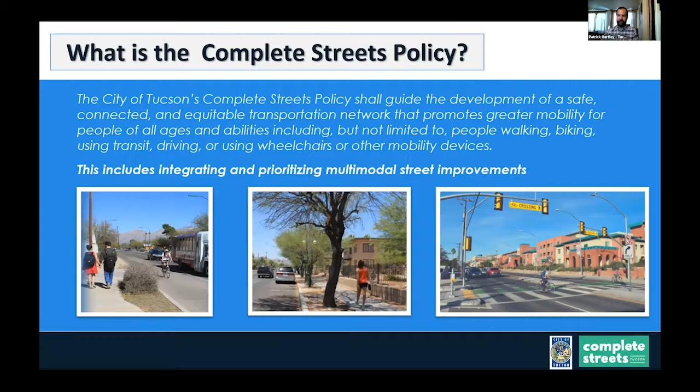One of the major strengths of this particular policy, I think, is that it wasn't just developed by staff and sent up the line to mayor and council for action. It was actually the culmination of over 2 years of community work, community building, education, and really establishing and building momentum behind communicating to residents of the city what complete streets are, the value of them, and building that support so that when it came to discussion by mayor and council, it became an easy action for them.

So we began in October of 2016, and this was really a community-driven effort to create the Complete Streets policy led by a local organization called Living Streets Alliance. And they were building the community, doing the groundwork, building the community support, doing the education, and later on actually engaging the department, the City of Tucson. So by the time we did bring this to mayor and council, it became a strong partnership driven by the community, guided by the community to get the support and the buy-in of the city's council.

The policy itself is really guided, driven by these series of guiding principles, which I think are key in our framework that we want to use for all of our transportation decision-making going forward. So looking at making sure we're thinking first and foremost about safety, that as we do transportation design and planning, that we're considering accessibility of all people, people of all ages, all abilities. Strengthening our commitment to equity, diversity, and inclusivity. In particular, right now we're going through a long-range planning process, and we are looking at what that means for the types of projects that we want to pursue in the future of the City of Tucson, and really defining equity in a way that is consistent with the language of that policy.

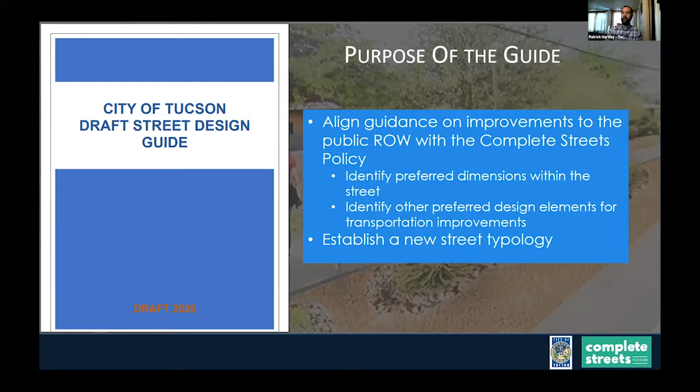The intention of the street design guidelines we're working on is to be guidelines, not a new set of standards. However, once approved, the guidelines would inform any future standards or policies we adhere to in the department. The intent is really to be descriptive of how we want the streets to look in the city of Tucson, based on the policy language about meeting the needs of all users and being comfortable places to be. What does that look like in execution?

They're supplemental to existing engineering practice, not a whole-scale replacement of everything we do. And it has multiple audiences, so it's presented in a way that can be used by city staff, project development teams, but also we hope it's something the public will engage with, ultimately making them strong advocates for complete streets type projects.

The use is intended to be at the planning level, planning and early design, referenced early in project development. This isn't an engineering document.

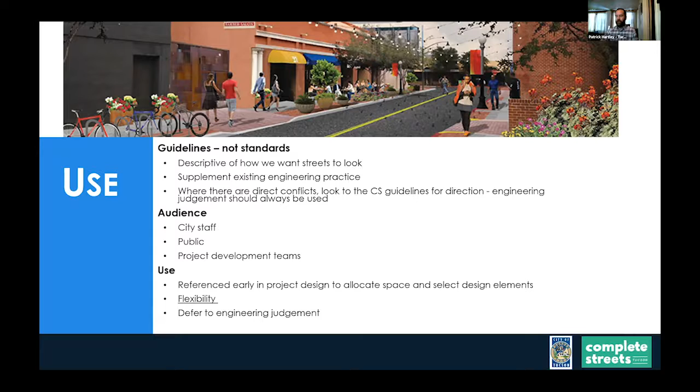Throughout the entire design manual we're developing is a commitment to flexibility, understanding there are going to be extenuating circumstances on all of our projects that will need flexibility. But what it's communicating is really the intention of the department: these are the types of decisions we want to make when we have X number of feet of right-of-way for a corridor or a roadway improvement, and this is how we want that space used. In all cases, we want to make sure we defer to engineering judgment as appropriate, to make sure we're building the safest facilities.

So one of the things we're looking at is developing a new street typology, which is going to be complementary to the existing federal functional classification system.

So it's not going to be a replacement for the functional classification system, but really it is a structure by which we can guide design decisions and think about what we're trying to accomplish with a given corridor, given facility, and what users we want to prioritize in our investments.

We're looking at a structure of 9 new street types rolling out in the city of Tucson, based on a combination of the function of the roadway, including operating speeds plus volumes, as well as the urban environment. We've got downtown university streets, the roads around the University of Arizona or within downtown; neighborhood commercial streets, which are smaller scale, residential scale commercial; urban thoroughfares; urban connectors, which are denser areas of the city but high volume roadways; suburban connector; suburban thoroughfare, same idea as the urban context but within a suburban context; neighborhood streets; shared streets; and industrial streets.

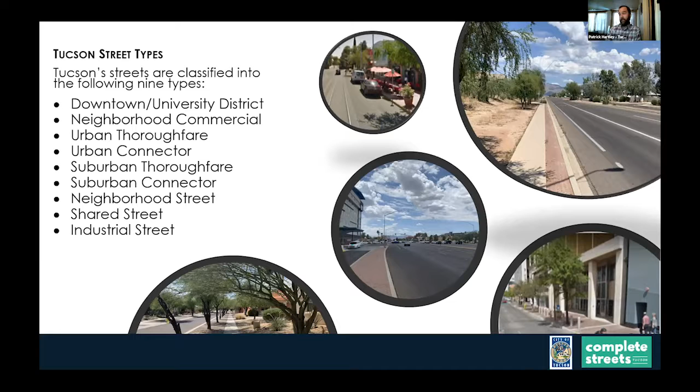And this is how we are applying that. So this is a very busy screen, I recognize that, but it's intended to communicate how we're approaching laying out our streets. We've broken each of our roadways, based on the specific street type, into preferred dimensions of the roadway elements. So we've taken the pedestrian realm, the street realm, and the median realm, and you look at the frontage zone, sidewalk zone, and planting zone within the pedestrian realm, for example. What we're providing as a department is a preferred minimum and maximum dimension within each of those street design elements.

So we're looking at a downtown university street, for example, and the sidewalk—our preferred width of the sidewalk, knowing that's going to be a high activity pedestrian area, would be a preferred width of 8 to 12 feet. Minimum is 6 feet, and we're not going to establish a maximum.

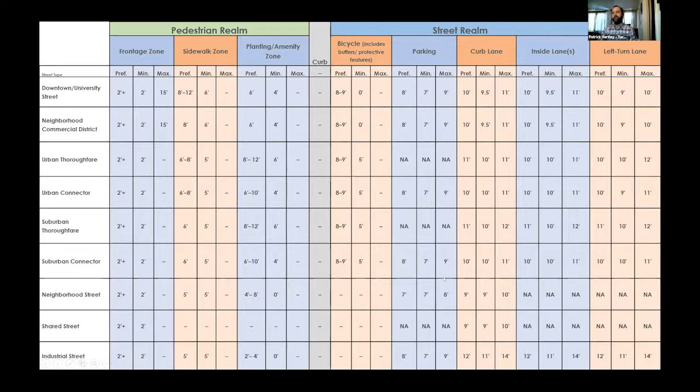And then if you look over at the other side, you can see that narrower travel lanes would be in those operating environments. Comparing the urban thoroughfare to the suburban thoroughfare, for example, you would have a narrower sidewalk as the preferred width than you would in the downtown environment, a little wider inside travel lanes, and on and on. The suburban, which would be assumed to have a higher operating speed, has wider travel lanes, for example. So this is the reference, the lookup table for the design considerations for each of those various street types.

The guide also provides a number of example cross-sections that are used to illustrate what the complete streets concept is intended to look like within the city of Tucson, and how we want to prioritize space within a given right-of-way.

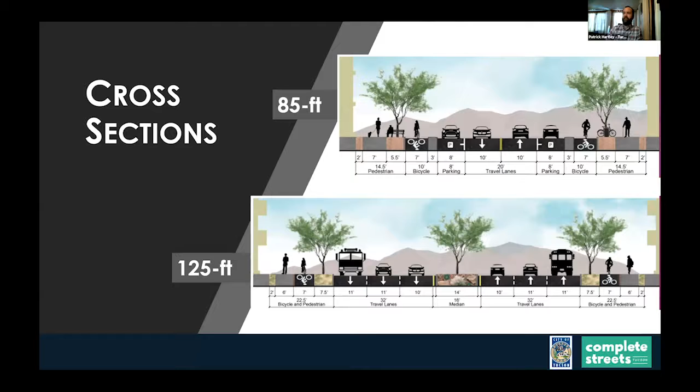So we're looking at wrapping up the design guidelines, which I think will be really a valuable tool for us in the implementation of the complete streets policy as we move this forward.

We closed the comment period on the design guide in June of this year. We're working on updating the document based on those comments, doing document layout, adding graphics, and we're looking to bring it in front of mayor and council for approval and review in fall and winter of 2020.

The nice thing about this, and what makes this easier from a staff perspective, is that we've already established the support of mayor and council around these concepts through the policy, and they've given us our marching orders and direction to develop these types of documents to rethink the way we design our streets. So we're confident that should be a pretty straightforward exercise, and we already have the support of leadership within the city. Once we approve the guidelines, it's going to give us departmental direction to begin updating all of the other standards and policies we use in road design.

So looking at our technical standards manual, our access management guidelines, engaging with the fire department around the Tucson Fire Code, to make sure everything is in alignment and consistent with the overarching goals of the policy and the guidelines.

We've also started a couple of initiatives in the meantime, so we wanted to make sure we were keeping the momentum going around the policy. We didn't want to do the policy and then come to a full stop, releasing the design guidelines a year and a half later. So what we're currently working on is the Move Tucson Long Range Planning Initiative.

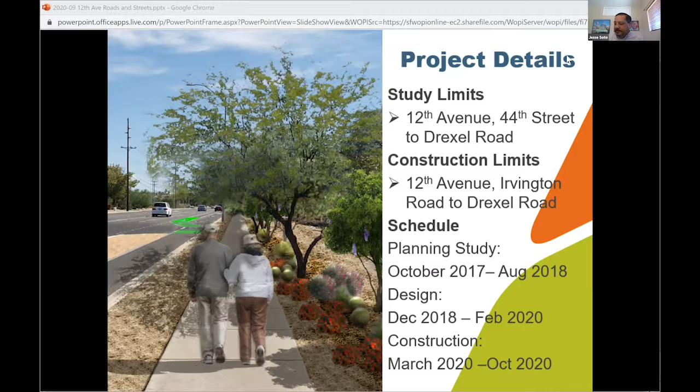A few years ago we looked at 12th Avenue, and the purpose was to look at the multimodal street improvements we could probably do within the area, to establish priorities and investments along 12th Avenue to bring in a design that we could hopefully find funding for sometime in the future and make the improvements along there a reality.

Traffic volumes along 12th Avenue range anywhere between 6,500 vehicles per day to 19,000 vehicles per day. So it gets pretty heavily used, from the area of Ajo going up to Irvington, and obviously we all know Valencia as well.

During a 5-year period, we did a study from 2011 to 2015, where there were 17 crashes, 3 involving bicyclists. 14 of the bicyclist and pedestrian crashes occurred after 5 p.m.

A sidewalk and driveway inventory was also performed along 12th Avenue. It showed that 19% of the area didn't have actual sidewalks, and approximately 1/3 of the sidewalks along the area abutted to the curb. We also looked at the multiple driveways along 12th Avenue, which gave us a feel for what was going on in the area. There was a lot of concern because of the wide amount of driveways that every business had along the corridor there.

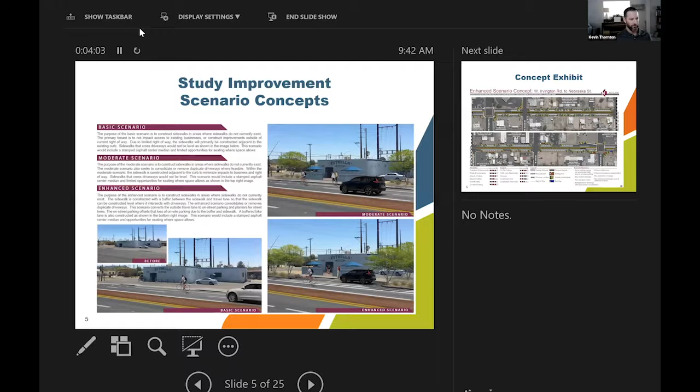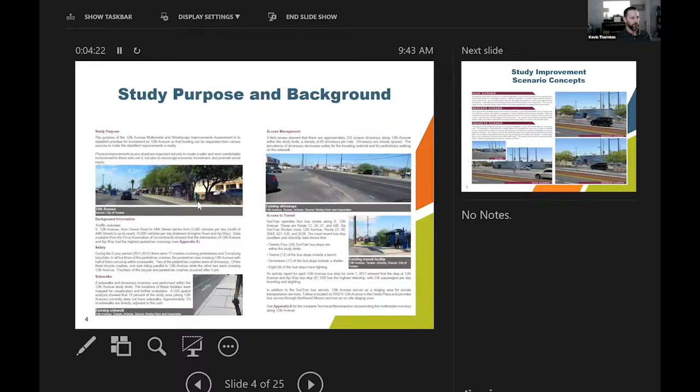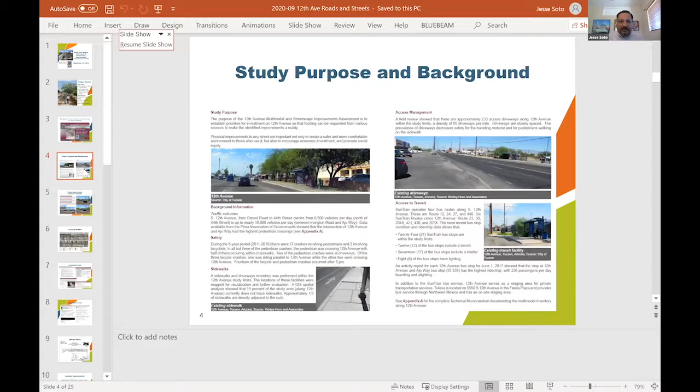Jesse, we're not seeing your slide switch — I think we're still on slide 3. Is that the slide you're on? No, it should be on slide 5. What do you see now? Sorry, we see the PowerPoint edit view, not the presentation, and it's showing slide 3. Maybe press present. Press the little present button at the lower right of your screen, the present slideshow button. No, it's not showing anything. Now we're not sure — oh, we see slide 25. Under display settings, is there an option to switch the main screen? Now, okay, we're back, we're seeing slide 3. Sorry, maybe try resume slideshow, or that's where you just were, isn't it? You see slide 4 now? Yes, okay, let's do it like this. Now we see slide 5. Okay, sorry about that, geez.

So during the actual design phase, we developed 3 different concepts along the corridor. The first concept we called the basic concept. It was just to look at installing new sidewalks and ADA compliant sidewalks throughout the corridor, and also make small improvements such as some stamped asphalt and small modifications to landscaping.

The second concept was what we called the moderate scenario. The moderate scenario included sidewalks, some reduced driveways, and put in some stamped asphalt along the median there.

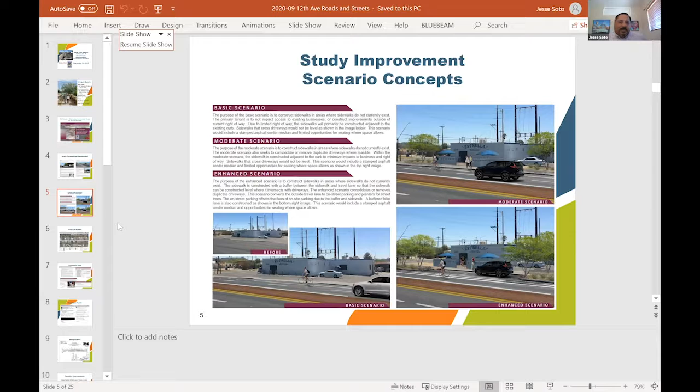But also looked at opportunities of possibly closing some of the driveways along the actual corridor. The third one is what we call the enhanced concept. This one here was pretty much the full complement of everything.

This is where we had ADA sidewalks behind curb. We had a buffer between the back of curb to the actual sidewalk, a 6-foot sidewalk. On street, we narrowed down the actual effect of the road from 5 lanes down to 3 lanes, and also included some on-street parking. But the most important feature on this one was also the buffered bike lane that it offered, a 6-foot buffered bike lane along there. So this concept was really the one we were targeting, really the one we wanted to try to go for.

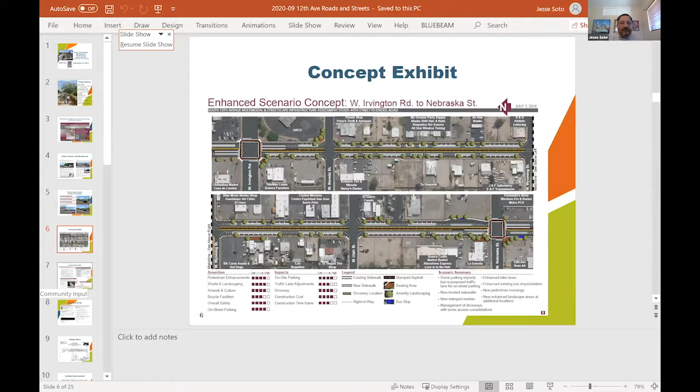We had a lot of community input. We went out to multiple events, meeting with neighborhood associations, meeting at different events, going out into the public, doing some workshops, and trying to introduce them to what we're trying to look at and display, so they could grasp what we're trying to do within the area.

Obviously, a lot of this was new. People didn't really understand it. They weren't sure how it was going to happen. They were really kind of hesitant to even accept what we're going to be doing out along 12th Avenue. It took a lot of discussions, many discussions, a lot of front work to kind of get out there and just assure people that what we're doing is something new.

And obviously, we as humans are kind of nervous about change sometimes. So we look at things and right away we don't like them. Therefore, having the discussion with the public, business owners, and also tenants was our biggest priority. We wanted to make sure we were getting their feedback and listening to them, because that's important for a partnership with the community.

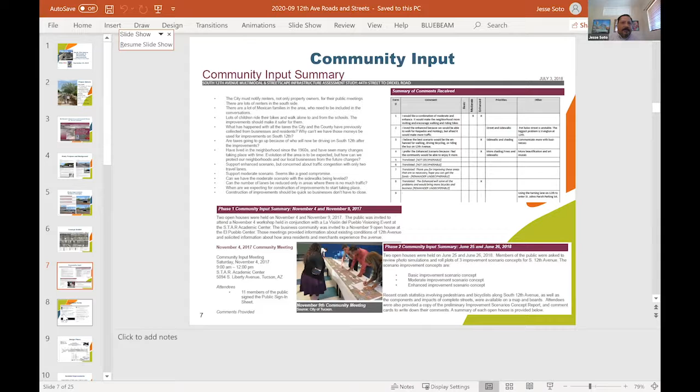We used it in all of our meetings, and it provided a lot of good information as far as what the public was looking at and what we needed to do within the area.

So now going into the design phase. Again, the design phase is something we wanted to ensure that not only were we, the city of Tucson, looking at all the different complete street models and how we're going to approach this, but also talking to the business owners and people immediately impacted by this reducing of the lanes, or also just leaving the way, what they wanted to do, and what we wanted to hear from them as far as what the need was.

So the design phase took a while. It took a lot of modifications. I know Kimley-Horn, we were going back and forth on some of the driveways, for example. There's something like 233 driveways throughout just that area alone.

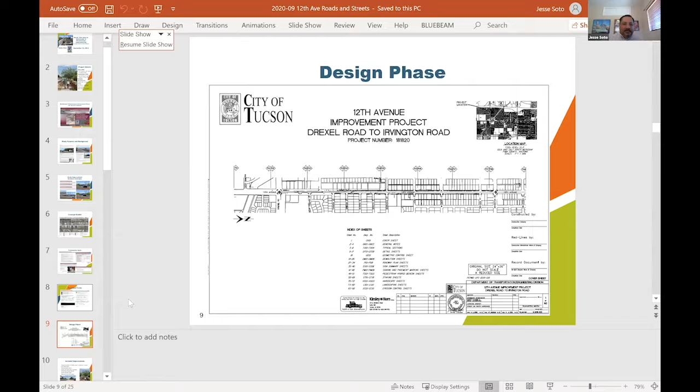So the design took a while. In this design, we finally concluded that we're going to come up with the reduction of lanes from 5 to 3 lanes, look at new sidewalks, put in some protected bike lanes, also enhance pedestrian crossings and pedestrian refuge islands, enhance bus stops, and reconstruct driveways.

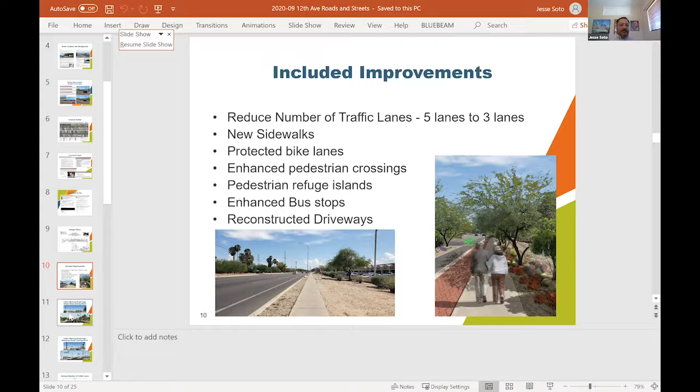Sorry about that. So here is the model that we actually used for the cross section along 12th Avenue. We kept the 11-foot center turn lane, 10.5-foot travel lanes. You got a 10-foot buffer there. The 10-foot buffer also includes on-street parking, but it acts as a buffer protector also for the 6-foot bike lanes. And then we have about a 3-foot buffer behind curb, and then a 6-foot ADA compliant sidewalk.

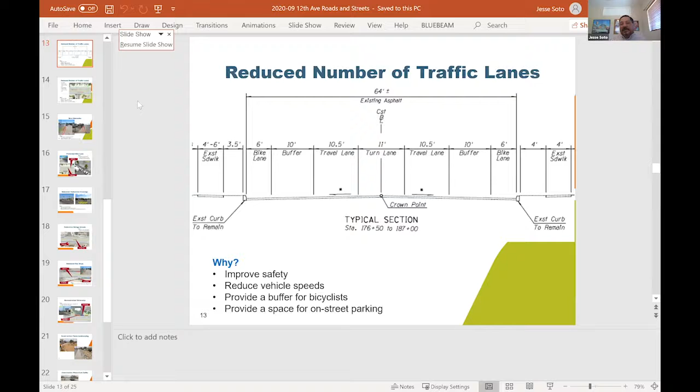So this shows how reducing the lanes, one going southbound, one going northbound, keeping the center lane, but also shows the medians and also the buffer for the protected bike lane, and then just shows a 6-foot sidewalk behind curb.

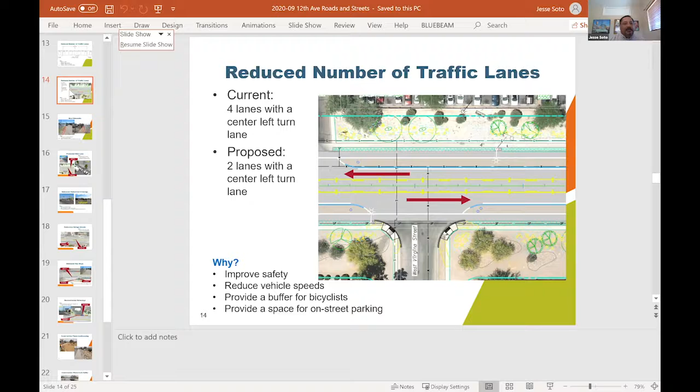So here, obviously there were a lot of concerns regarding ADA issues. We had people that were using walkers or wheelchairs, and they couldn't gain access to that bus stop located right there on 12th and Nebraska. They actually had to go onto the street because there was no ramp either. It was just a 6-inch vertical curb along there. So we got a lot of concerns about that area.

And so it feels good that now when you go out there, it's finally completed. And now you have ADA accessibility all the way through that area. And now residents, people with ADA issues, don't have to go out into the roadway anymore. And now they can travel safely along the new sidewalk improvements that have been added from this project.

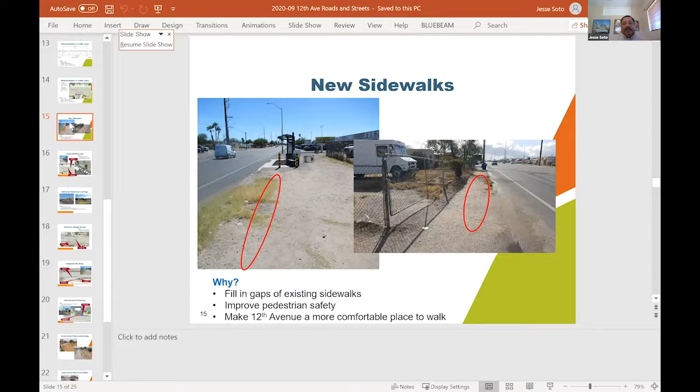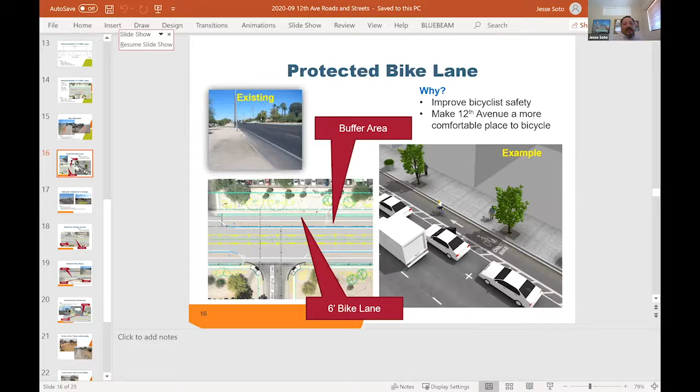Here are the protected bike lanes. Just kind of shows you got your buffered area, then you get your 6-foot bike lane. If you look at the example, you get your 6-foot bike lane, then you have your 10-foot buffer with on-street parking, and then you have your travel lane. So it allows people to feel a little bit safer as they travel through the area, and to also feel like they can get through there a lot smoother, a lot better.

We're also going to install a HAWK light over on Wyoming and 12th Avenue. We had a lot of feedback from the community, as there is a bus stop right there on the west side of the road that is used by a lot of people in the area that go back and forth. The second picture on your right kind of shows where people are just crossing at will. And again, that was an issue that we wanted to address, and if that bus stop is being widely used by residents of the area, we want to make sure that they were able to cross that area safely.

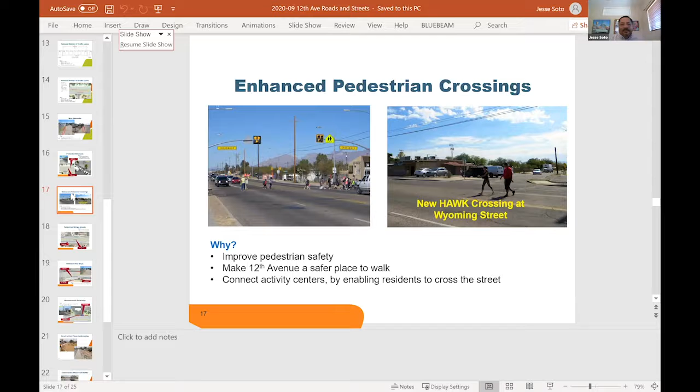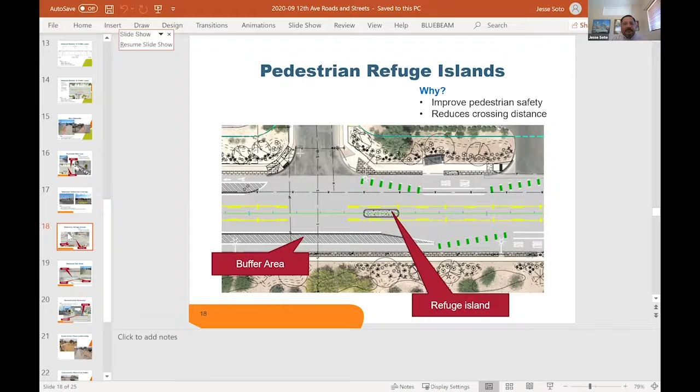This just shows in the bus stop area how we created the buffer along there, so that we can have a smooth travel lane, but then the bus dips off to the side to go and pick up passengers.

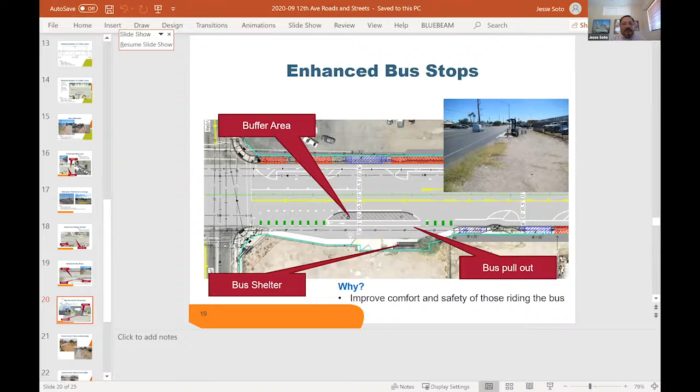And then, like I said earlier, we reconstructed new driveways. We had like 288 driveways. We narrowed that down from 288; I think we cut that in half. So that allowed us to create smoother travel for ADA and people walking and using that area, to not feel as if they have to be in a constant alert mode walking through there.

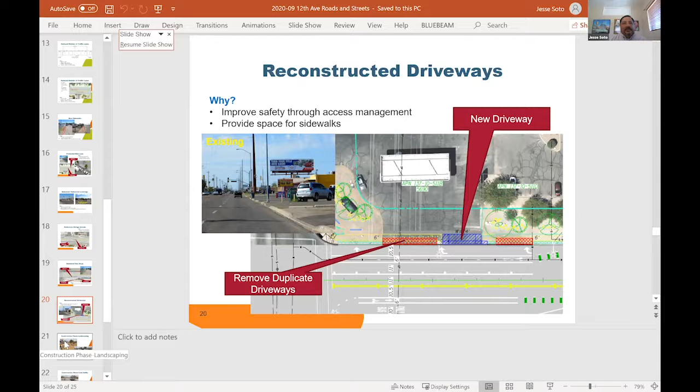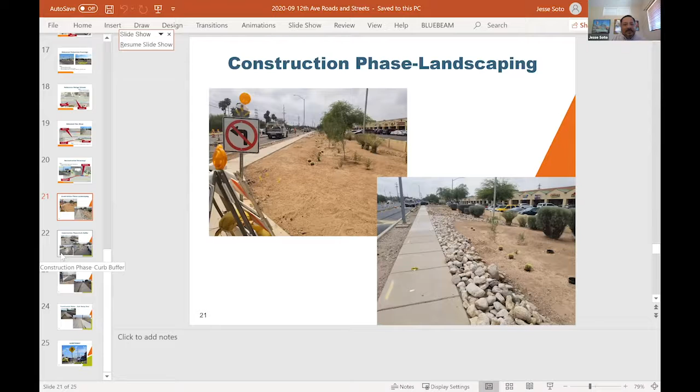We're now in the construction phase, and we're hopefully finishing up rather soon. This just shows some of the pictures of the landscaping that we're doing within the area. We'll have that landscaping under contract and monitored for maintenance and watering for the next 2 years. We want to make sure that we establish it and it looks beautiful within the area like it should. So we'll continue doing that for the next 2 years, cleaning and maintenance.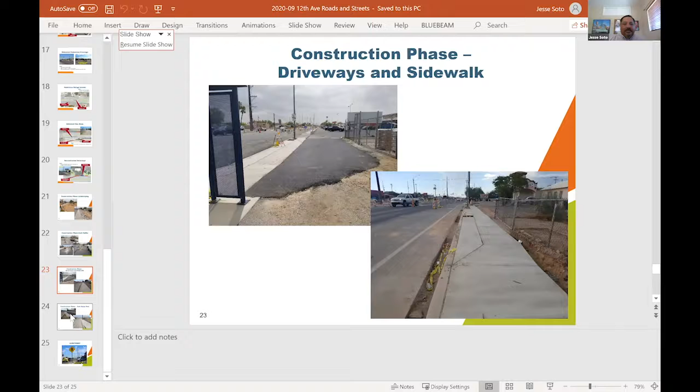I'll just finish up real quick. This just has a sidewalk. Again, just some of the sidewalks that we put in. Again, we just did some bump outs there as well due to telephone posts, couldn't move those. And then that concludes my presentation.

Well, one thing I just want to put out there, and I can entertain questions, please. I just wanted to put out there that this was a strong partnership with the community, and we had a lot of good input from the residents in the area, also business owners, and the engagement that we brought to the table I felt was just over the top, and I want to thank everyone for that participation.

Thank you. Yeah, excellent presentations, Jesse and Patrick, and exciting changes coming to Tucson streets. So that's cool to see. We do have at least one question here, and I'm not sure which one of you want to address this, but the question is, does the City of Tucson intend to develop policies for shared use paths also? Jesse, you want to handle that one?

I don't really know the answer to that question. We hope to. I mean, pathways are a whole other thing. I've done a few of them within residential areas that neighborhoods really tend to use because they like to have that safety factor. But yeah, we hope to design something in the future that will include pathways.

And we're providing some general direction in the street design guide that we're working on. I think that's something we could develop more fully, particularly where we have side running paths that intersect with local streets. I think we need to work through some discussions in terms of what traffic control devices we would use in those instances. We've been inconsistent. There are some places where we have a stop control for the path user. There are places where we don't have a stop control for the path user. Sometimes we use a yield sign. So I think there is some policy language that we would benefit from developing.